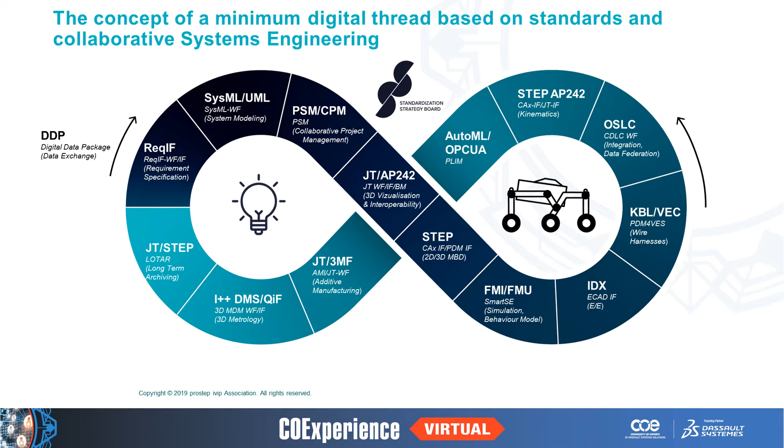PROSTEP IVIP Association is also interested in providing different standards that can be utilized throughout the product lifecycle, and so they might be more domain specific, but being able to bridge the different domains and vendor-to-vendor integration using formats, and that could be with requirements with ReqIF in the beginning, system modeling, UML, JT or AP242 step data, other step 10303 data, IDX, OSLC for link data and federation, as well as long-term archiving and additive manufacturing type standards.

Part of what makes PROSTEP is its independence and its vendor neutrality. We are partnering with all the major vendors within the ecosystem for engineering. That includes PLM vendors like Dassault Systems or Siemens, PTC, and others, as well as other CAD providers, analysis software, requirements management, ALM, ERP, and other types of domains.

PROSTEP has a long history of partnership with Dassault Systems, and that goes back to CAA development for CATIA V5 and before, as well as MatrixOne integration before it was ENOVIA even, and then also now modern integrations for 3DX data exchange, XPDM interfaces, and as well as other one-part integrations and other things.

PROSTEP's core focus is to solve these modern Industry 4.0 product lifecycle challenges. So that might be trying to handle the complexity and using integration, speed things up, or offer exchange of data between suppliers and OEMs, things of that nature. And then couple that with some of these strategic themes: MBD and MBE, model-based systems engineering, digital twin and digital master, and software, hardware, ECAD, and manufacturing integrations.

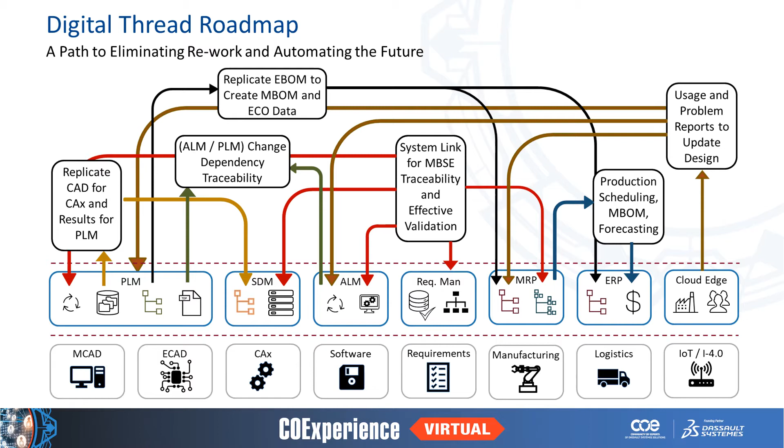With replication, it could be that the binary data that you have in one system needs to be put into the other system. So models of these data models don't always fit, and you might need to be able to massage it and map it in order to get it into a format that it goes into the other system. And there might be some data loss if they're not the same type of system.

But with replication, we actually pull the data out, transform it and put it into the other system. And normally this would be done for an integration that moves binary data, or a migration type of scenario.

Second, federation, and that's not moving the binary data, but creating traceability between these different systems. So this is popular with the OSLC standard within the ALM domain, and providing links that can be populated within one system that then can push or pull data into it in order to provide some visibility to it. So within ALM or within model-based systems engineering, if you want to be able to look in 3DEXPERIENCE and then reference the data, then you can do that using these types of standards.

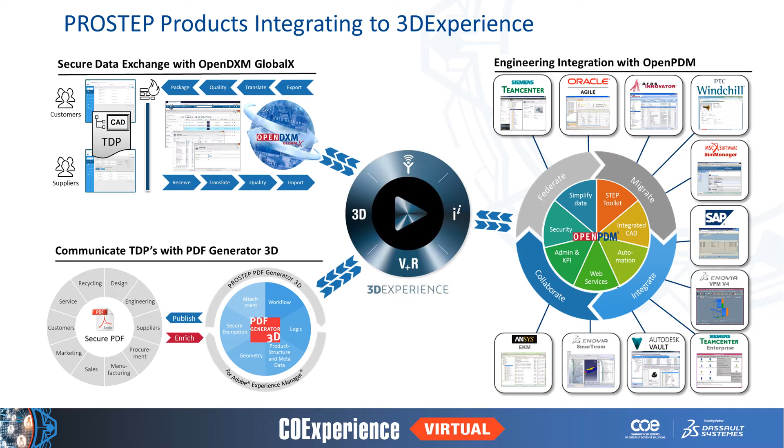So with OpenPDM, we're able to integrate, migrate, federate, and collaborate data between these other connectors and 3DEXPERIENCE. There are a variety of different connectors for 3DX that we offer, and some of it is historical based, and others depends on the use case that you want to use the data and what modules you might want to enable within 3DX.

The second is the XPDM adapter. And this is used to create a unified product structure, but then also import CAD data with Powered by PLM collaboration services, supporting CATIA, Creo, and other types of formats for import. And then the third and the most modern interface is our REST interface.

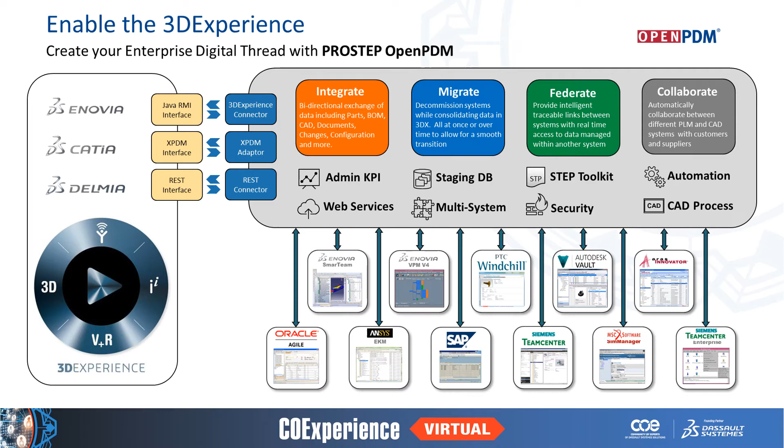In the middle, we have different tools that we also include with OpenPDM, and that might be staging databases for performing migrations, STEP toolkit for transferring data into STEP or out of STEP, not just CAD and geometry data, but also PLM data. CAD process handling and interrogation, and security and web services and automation and other things as well.

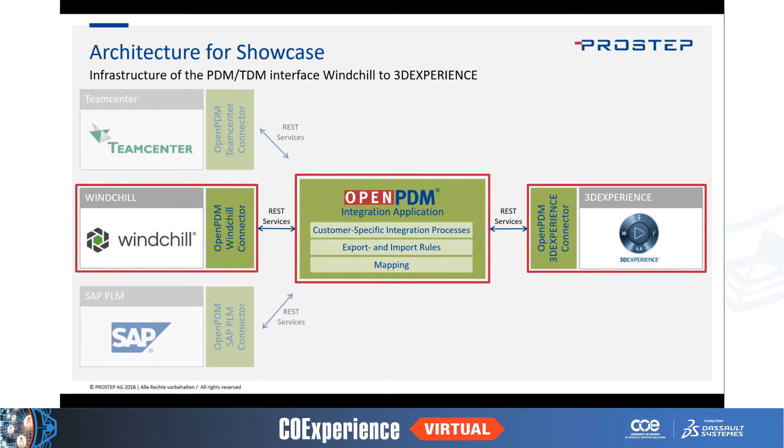So I'd like to show an example of this integration. This is Windchill and 3DX with OpenPDM. We have a commercial off-the-shelf product, OpenPDM Connect, that includes this pre-configured use case for doing a design integration between these systems. So that's something that we can quickly deploy and get running. We can also add to that other customer-specific logic, but it already comes pre-configured for doing this fairly easily.

We're going to do bidirectional synchronization, starting in Windchill. We're going to take a look at the structure in here. We have our test data. It's a torque converter, and it's an assembly, probably 30, 40 components.

We're going to sit on the top level and say send to V6, and then that's going to go ahead and behind the scenes trigger OpenPDM and exchange that data. That data is imported using the XPDM adapter. Because of that, you can use it within design mode here, and you could also use it in Delmia or in other types of applications within 3DX because of the powered by integration, PLM collaboration services integration.

So we're going to go ahead and add an existing product. We've got another subassembly of the torque converter that can be added within here. So we'll go ahead and search for that and then add that. And then we'll see that in the updated design.

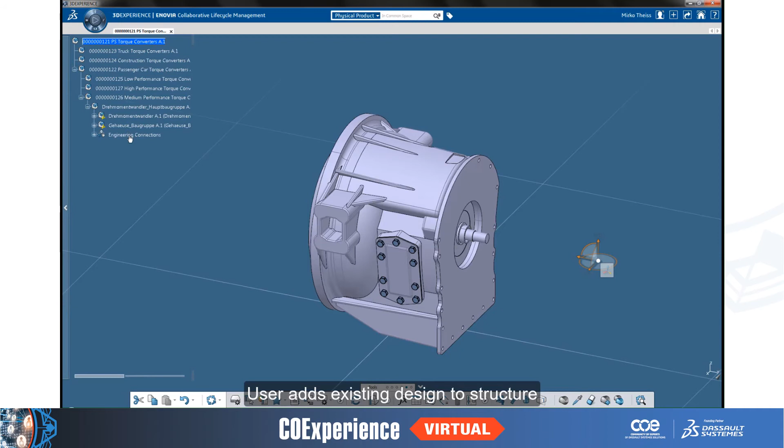There you go. And we're going to go and save this back in 3DX and then initiate the transfer back through XPDM to trigger OpenPDM in order to synchronize it with Windchill. So go ahead and save that and then sync it back to Windchill. This is going to export it through the XPDM adapter and then use the Windchill connector in order to import that data. And it'll be available within Windchill.

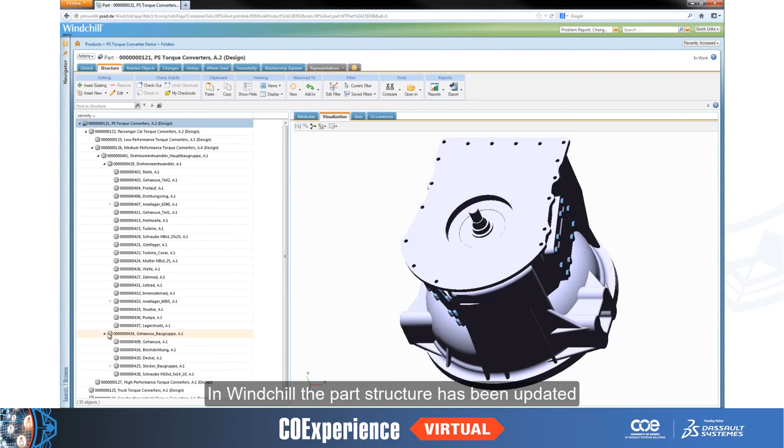So now within Windchill, if we go to the structure, it's more complete, including the other subassemblies here, as well as generating the Creo view data. So you can take a look and drill down through there and see that the Creo view is available for these new structures.

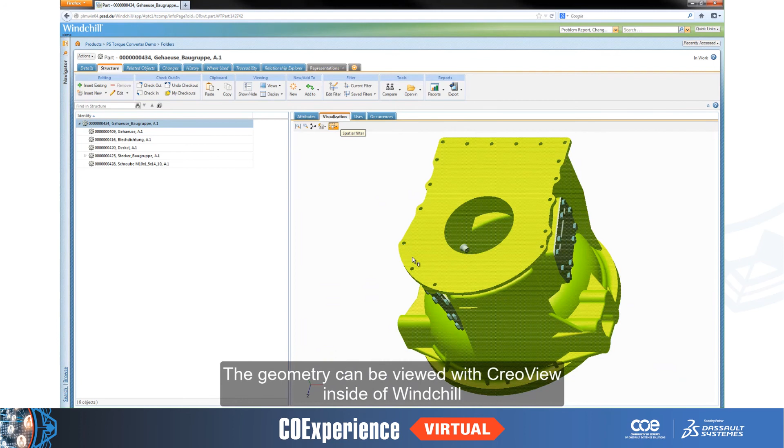So we can go see that there's usage and occurrence links, make sure that it's all set properly, and see the attributes and other types of information for it, as well as visualization. We can set all sorts of data here, so lifecycle templates and status and other types of Windchill data as well.

Here's another example of integration, this one with Teamcenter and 3DX. And we're going to start within Teamcenter in this one, and then opening up the structure manager. We've got a nose cone for an aircraft.

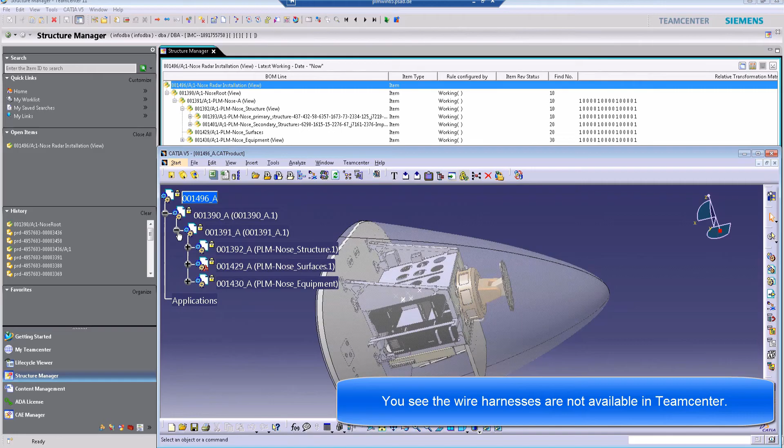Load that within CATIA V5. You can see the TCIC and CATIA V5 integrated. And then we're going to use a combination of our Teamcenter and a Teamcenter connector, as well as the TCIC controller that we have in order to export that data.

So we go to 3DX. We can use our widget for OpenPDM, query live and kind of federate that data. And then click go on that to ask for the synchronization. And we can see that a process started within the OpenPDM admin page, and you can watch these processes and what's going on with all the processes there.

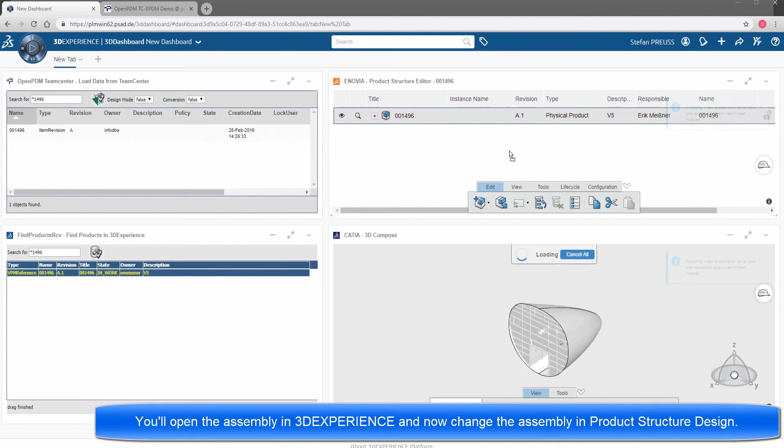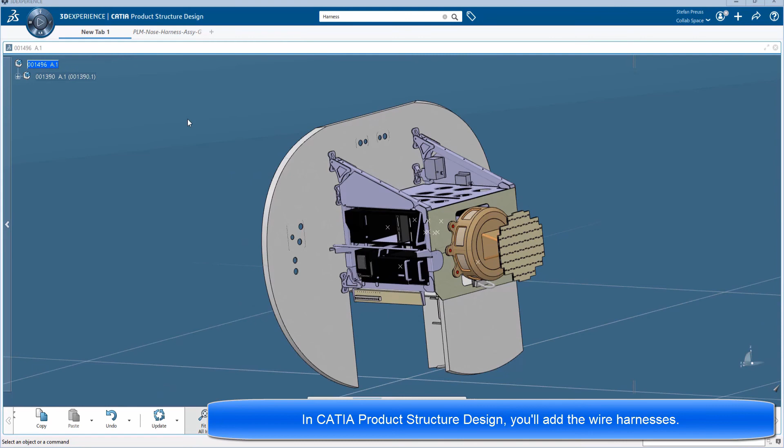Once that's been completed, you see we've got our VPM reference created, and we can open it up in the structure editor and change that structure. So we add that here. What we want to do now that we're in 3DX is, say we're doing harness design here, then we can go ahead and add the harness to the nose cone using this existing product.

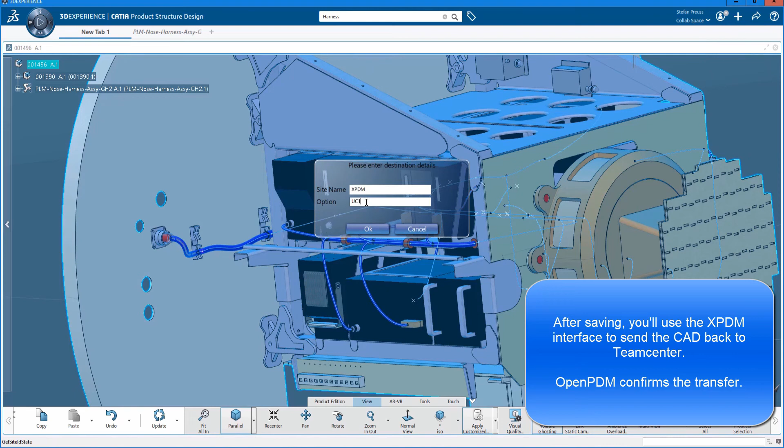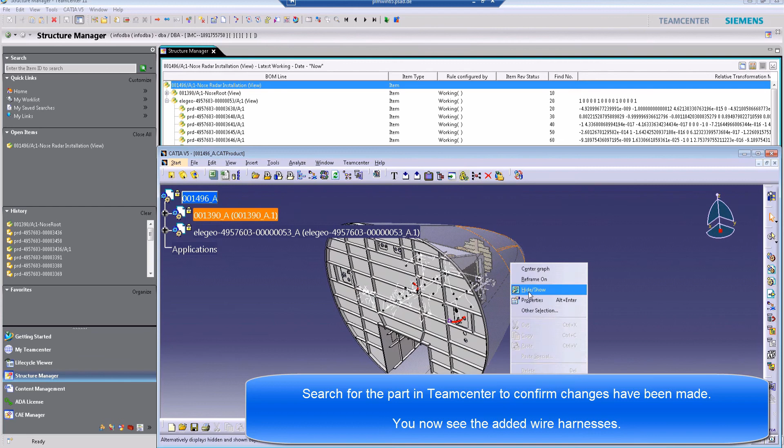Now that it's all assembled together, we can save it and using XPDM, send it back to Teamcenter. That transfer is going to queue some new activity in OpenPDM, process the data through that XPDM adapter, and then import the data through the TCIC controller so that you have CATIA V5 data available. Now you see your wire harness as well as nose cone together within CATIA V5 in Teamcenter.

OpenPDM has a wide range of connectors that really come in a lot of different categories. At the bottom here, you see our standard PLM or PDM type connectors that include 3DX, Windchill, Teamcenter, SmartTeam, VPM, Agile ePLM, Aras Innovator, and others. Also support for a lot of legacy systems and a lot of connectors that aren't on here.

On the right-hand side, ERP and ALM systems like Rational, Engineering Lifecycle Management, and Integrity, as well as Exalead, ThingWorx, and other platforms like that. We can implement a connector for your legacy system as well if you need to plug into our platform.

We've got the CAD connectors for handling CATIA and 3DEXPERIENCE, CATIA V5, NX, and Creo. These are connectors really for interrogating the data to understand the attributes of CAD, the dependencies and relationships for integration and migration purposes. And then different formats on the left.

So OSLC for integrating into Magic Draw and Cameo, as well as other ALM platforms, web services that really give you the availability of all this type of data, and then STEP and XML type formats so that you can export and import and plug those in.

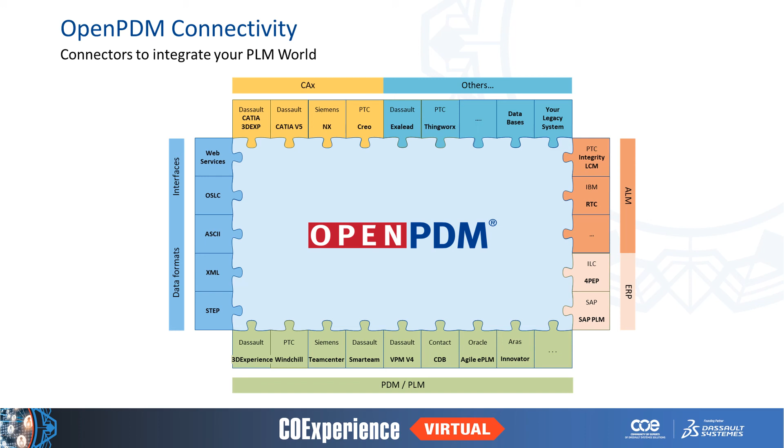Another product from PROSTEP is OpenDXM Global X. This is a secure data exchange platform that's tailored for engineering and manufacturing data and integrated into 3DEXPERIENCE. We have our plugin within 3DX where you can select where you want to send the data.

That means what data you want to send, as well as the recipient of that data, and it will automatically behind the scenes open up that data, export it, convert it into a format that your recipient needs. So if that's your OEM and they need it in a different format, it'll do that quality check, maybe rename and map the data into a format that's appropriate for them, package it up, and then send it out.

It would actually send an email that says your data's ready, and then your recipient can just come in and pull that data down, and it will log the transaction of when they arrive and pull the data down. There's also deeper integrations that you can have in order to provide more Dropbox-like functionality over to your customers and suppliers, or even your own.

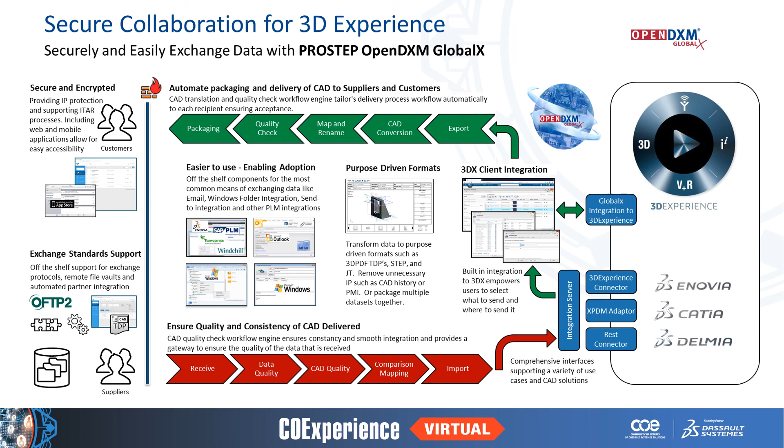Be able to take data from your suppliers, import it, check the quality, so make sure the attributes are right, make sure that all the data is there that you need, examine the CAD and do a CAD quality check, and compare it to what is already existing within 3DX and import it there too. This uses similar technology to OpenPDM and leverages those connectors, so it'll give you powered-by PLM collaboration interfaces, as well as 3DX and a new REST connector too.

We can also communicate effectively with our PDF Generator 3D and also can generate HTML5. This uses the same interfaces from OpenPDM that we discussed before to pull CAD data out, do the translation, and then put maybe a 3D PDF back in, and can accomplish a lot of different tasks like creating TDPs for manufacturing, work instructions, maintenance manuals, long-term archiving, and use it as a container to put STEP data or MS Docs or other data in.

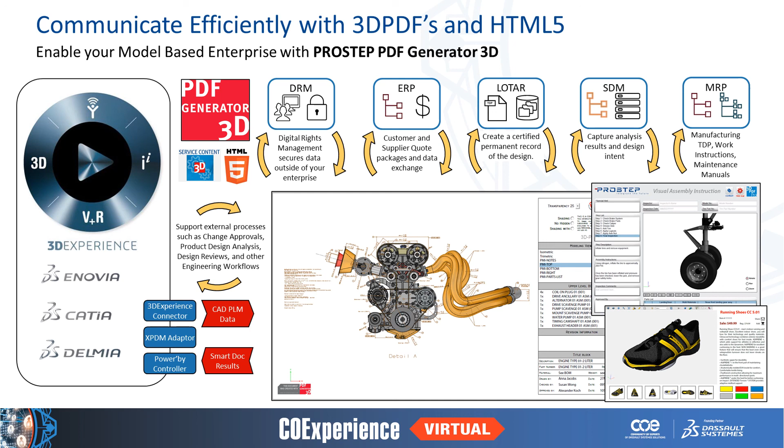Remember that PROSTEP is here to help. We've got hundreds of experts in different PLMs, including a lot in 3DX and Dassault products. We're also very well versed in standards, being that we are PROSTEP and part of the PROSTEP iViP nonprofit consortium, and provide software and services in order to accomplish your integration needs, whatever they might be.